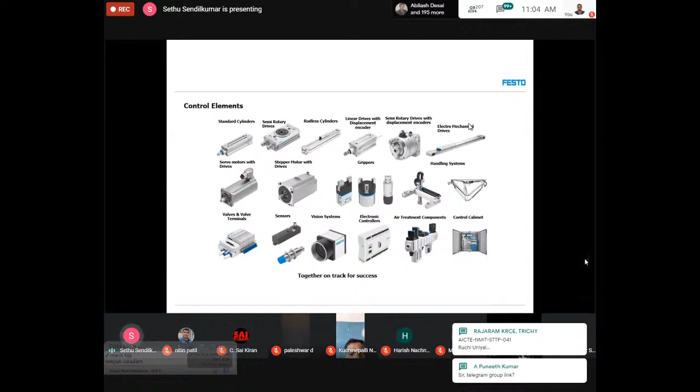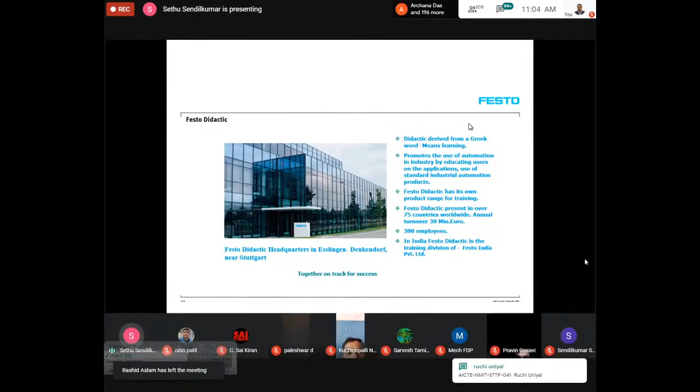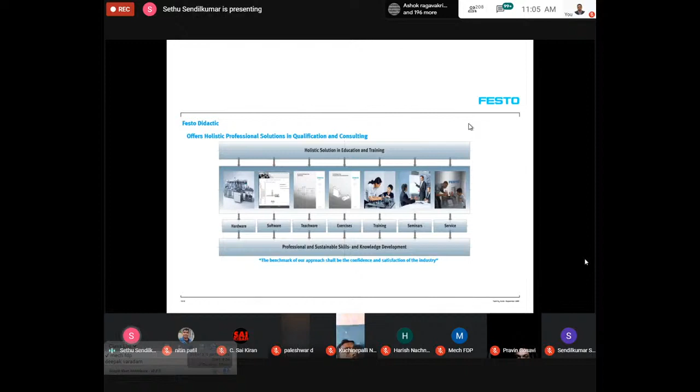Festo Didactic offers a holistic solution in the form of hardware, software, teachware, exercises which are in the workbooks, and training and seminars, along with other related services for spreading the knowledge in the institutes as well as in the industry.

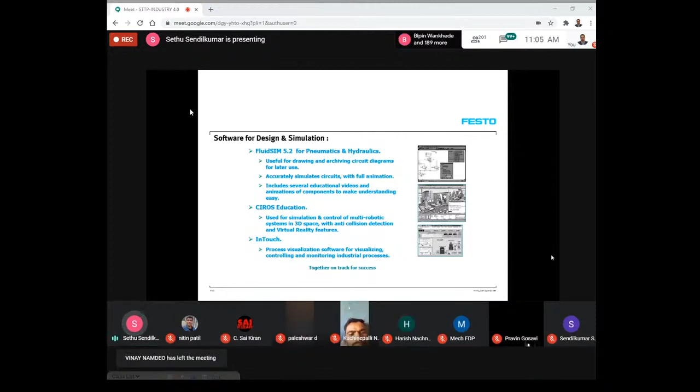There are a lot of softwares offered from Festo because we believe in a holistic solution. FluidSim is one of the softwares very popular in the institutes. We also have the CIROS Education, which we will be using in the second half and also tomorrow. This is a mechatronics software which is actually used to simulate whatever mechatronics applications are involved. We also have many other softwares like InTouch and other things like that.

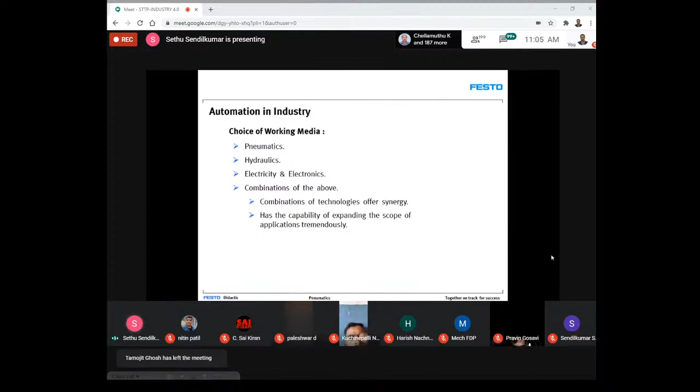We will now get into the introduction to automation. Automation in the industry can be performed in many ways. One such way is pneumatics, hydraulics, and electrics and electronics. So the choice of...

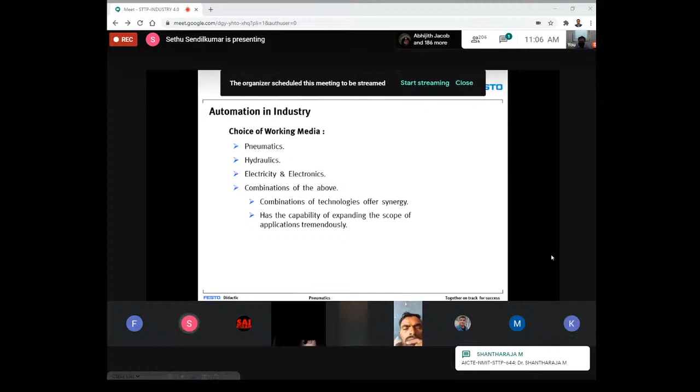...application has an inclination towards pneumatics, the reason being which we will see a little later. There is automation happening with other energy types also, like hydraulics and electrics, but pneumatics is predominantly being used, or it is synonymous with automation. That is what we are going to look at in the coming sessions.

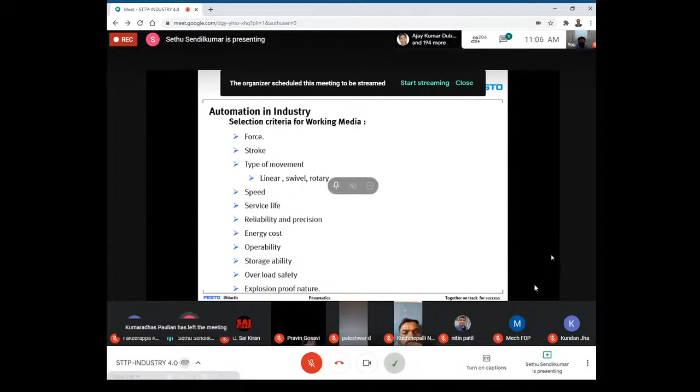If you look at the reasons for selecting this working media, especially pneumatics, force and the stroke length are the primary considerations. The reason being, force and the distance through which this force is applied is what is work. So naturally we are trying to use this energy in order to work. When employing this energy for doing work, we need to see whether it is adequate in terms of the force exerted as well as the distance reached through applying this force.

We might have different sorts of motion. Maybe we might have linear motion, we may have a swivel motion, or maybe a rotary motion. So we need to look at whether this sort of energy can offer this particular thing.

In the selection process, there are other secondary considerations also which we have to give consideration to, because if we overlook these, that might result in the failure of the application on the shop floor. One such thing is speed, which is an important consideration we need to look at when making the selection.

We make a big investment in the selection of this energy type, so we need to also look at the service life which can be offered by this energy or the components involved. Reliability is another important factor, because if we have a reliable selection of components, then we have trouble-free performance.

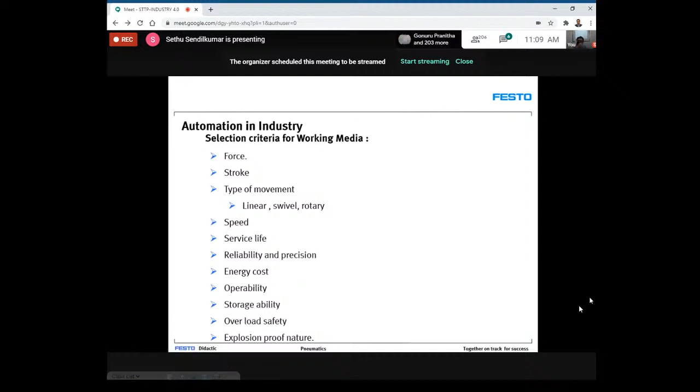If we look at the purpose of pneumatics and how this name was coined: pneumatics in Greek, or pneuma in Greek, means breath or wind. That is how the name pneumatics had been coined. It deals with the properties, motion and behavior of air. It is basically the use of this energy to transmit and also control energy through the use of pressurized gas. That is what pneumatics means.

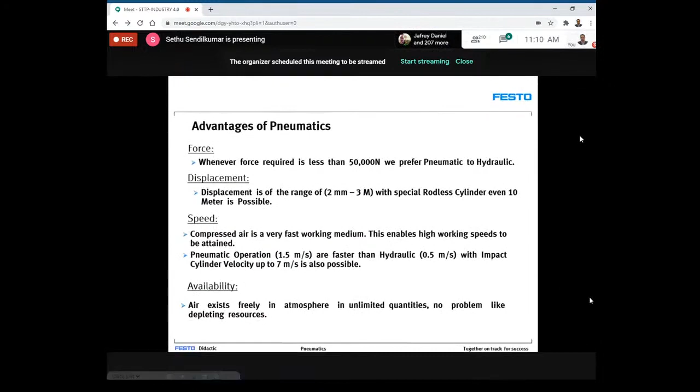So we were looking at the considerations when we wanted to choose the energy. We are always particular about what force is being exerted with the help of the pneumatic application. You need to limit it to 50,000 newtons. It's not that pneumatics cannot generate more than 50,000 newtons. The force is a function of pressure times area, and once you start increasing the area, you can derive any big force you want. But the reason for limiting it to 50,000 newtons is because it is an indirect form of energy. This energy is not God-given, it is produced. We use electricity, make mechanical movements, compress the air, and get this energy which we use in the cylinders.

So when we are doing this, we have to be very judicious, because air costs very much — every additional bar of air increases the cost exponentially. If you increase pressure to very high pressures, more than 6 or 8 bar, it is also not very suitable. At the same time, if we are doing 100, 200 cycles a minute, and the cylinder is reciprocating up and down that many times, you can imagine how much air is used in each stroke, which might result in spending air in a huge amount — not very economical, because we are using pneumatics in automation.

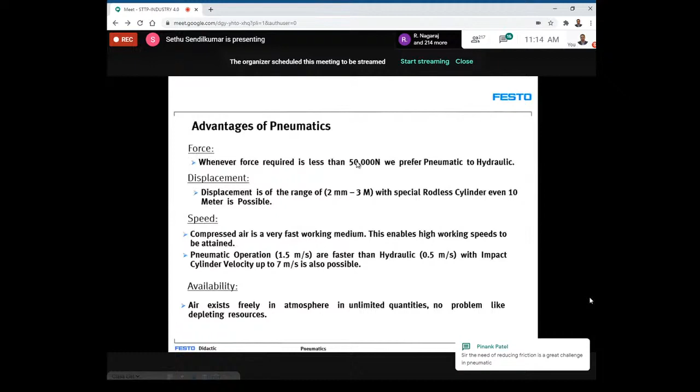Then, of course, it can be transported over a very large distance. Even 1,000 meters is possible without any significant loss in pressure. That is why we choose pneumatics as an energy type.

And of course, the performance from pneumatic systems is very uniform, in the sense that they are not affected by temperatures and pressures. That means you can work even up to 200 degrees centigrade and 30 bar pressure without significant change in the performance of the actuators.

Of course, cleanliness is one big important reason used in many industries like textiles, printing, pharmaceuticals, and all these places, because leaking pipes don't contaminate. They may leak, but they will not result in any contamination because the medium used is air. So we can use them to whatever extent, even with those leaks. That means it is very clean.

Explosion proof is the other reason. We are using only 5 to 6 bar of pressure in our application, while the components are rated for about 8 to 10 bar. So naturally, they cannot create any explosion because they are sturdy enough. The metallic body of the valves and cylinders doesn't explode at that pressure. So the advantage of using pneumatics is that it doesn't require any additional firefighting equipment with this arrangement.

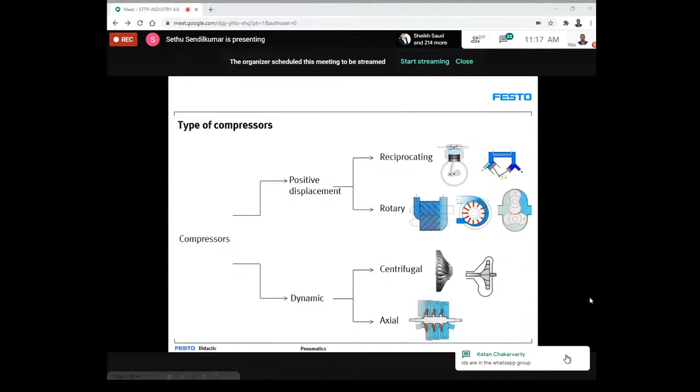So basically, if you look at the reciprocating and rotary compressors, they employ the principle of containing and pressurizing the air. The reciprocating compressor can produce anywhere between 0 to 15 bar, and you have something around 20,000 meter cube of air per hour that can be generated.

So any pressure is possible with the help of these reciprocating compressors, which actually produce compressed air at a very high pressure. Then there are also rotary compressors, which can be screw type, vane type, or lobe type. So they are also suited for pneumatic applications.

The screw type of compressors find wide applications inside the industry. Up to 25 bar pressure is possible, and about 60,000 meter cube per hour is possible with these sort of compressors. So very often we find the rotary, screw type of compressors being used.

Of course, the vane type of compressors are suited, but they don't produce very high pressure ranges. Maximum 7 bar is what is possible, and the flow rate is also not as high as the screw type of compressors. The lobe compressors fall under the rotary compressor category, but again, not very high pressures.

Similarly, the dynamic compressor.

Screen is not visible. No, I am in the presenting mode only. Sir, it's visible. Okay, now? Sir, screen is visible. Please let me know, because the screen is not visible now also, sir. Screen is visible now, sir. Please let me know in case it's not. I see one of the other laptops is not visible with the screen. So how many of you are facing this problem? Is it a big number, or just one or two?

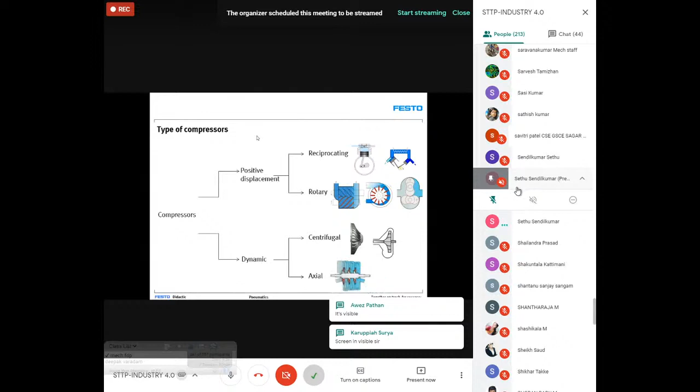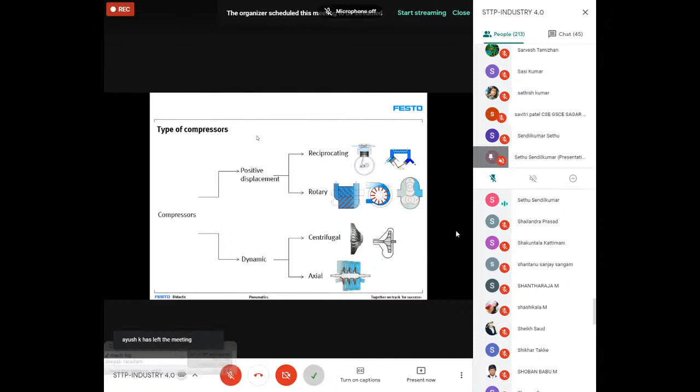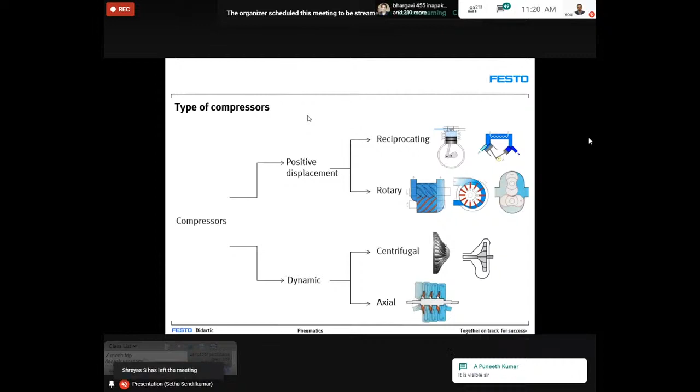Okay. So in the dynamic compressors, you have the centrifugal and the axial compressors. So basically, these compressors use the mass acceleration principle. Of course, very high velocity of air is being driven through these turbine wheels, by which you get a small pressure, about 4 bar, but a huge flow volume, about 5 lakh meter cube per hour, is possible. So you have a very high flow rate possible with this sort of compressors, but not a very high pressure, hence they are not used in a big way in pneumatic applications as such.

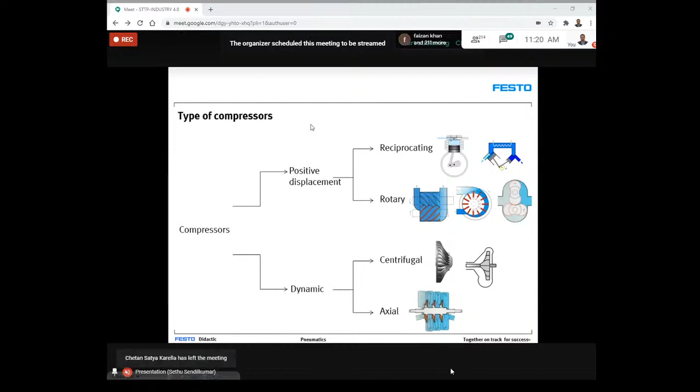Once we have produced this compressed air, the advantage with pneumatics is that you can store it. So basically, you can store this compressed air in reservoirs, which you can design according to your requirement, so that even 8 hours of production time can be supplied with this pneumatic air. Once you store it, you have the advantage of cooling the air so that you can remove some moisture present in the compressed air. Then you can distribute it to your different locations where the service units are, which further take care of treating this air.

So basically, the air distribution in your arrangement involves primary treatment and secondary treatment. The primary treatment is cooling and drying, which can be done with air-cooled or water-cooled arrangements, and then drying with the appropriate methods, which we will see a little later. Other than that, we also have the storage, that is the reservoir, which can cool the compressed air, and finally it can be given out into your network.

Usually the networks are spread across in a ring, so you can tap those requirements from the top at an angle so that water cannot climb into your application. Similarly, there is a gradient, say 1 to 2 degrees, so that the water can be collected at the end of the arrangement. That prevents moisture getting into your application.

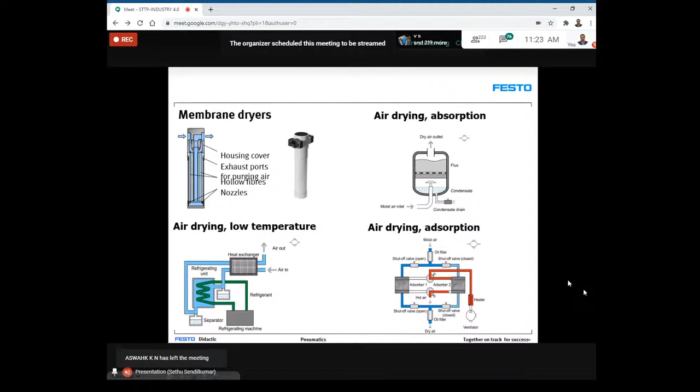In the refrigeration drying, the air is passed through a heat exchanger, where heat is exchanged between the incoming air and the outgoing air. Then it is passed through a chiller zone, where it is chilled further and condensation happens, and finally you have dry air which can be used in your application.

Of course, after having dried this air, you can straight away use it in your application, but generally we use a secondary treatment in every application. That's where you find the filter, regulator, and lubricator in every application. The filter is nothing but an arrangement where air is made to pass from one end to the other. In doing so, it passes through a swirl plate.

So once it is passing through the swirl plate, the air gets an angular twist, by which huge particles like moisture and dust get centrifuged, and the air hits across the baffle plate and is driven into the filter cartridge, which is usually a 40 micron filter. So the air from outside passes into the inside, gets filtered, and results in the outlet. That is how the filter works.

Of course you can go for ultrafiltration to whatever extent, but you need to look at how much pressure drop is going to happen. Excessive pressure drop actually costs you money, because you spent electricity to produce it, and then you are blocking it with the filter, resulting in more pressure drop, which is not an economical option. So wherever necessary, you can go for ultrafiltration.

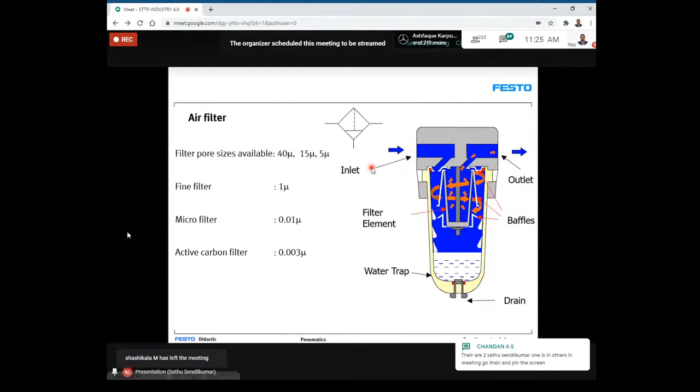Then you have the pressure regulator, which is used because the air is pumped from the source at a high pressure, somewhere around 1 or 2 bars higher than what is required at your application. So these pressures have to be adjusted to your requirement, for which we use the regulator. The regulator is an arrangement which reduces the pressure; it doesn't increase it. As you tighten the knob, it acts on the diaphragm. The diaphragm in turn lifts the plunger, and the air starts to flow between the inlet and the outlet.

Now, the inlet and the outlet are felt by the diaphragm at any given time. These pressures are going to vary according to the situation, maybe a dynamic situation where on the outlet there might be a block and the pressure is going to increase, or it might happen at the inlet also. That is felt by the diaphragm, and the diaphragm is either pushing out or drooping down. When it comes down, the spring on the inlet of this pressure regulator narrows the passage and starts to give little air.

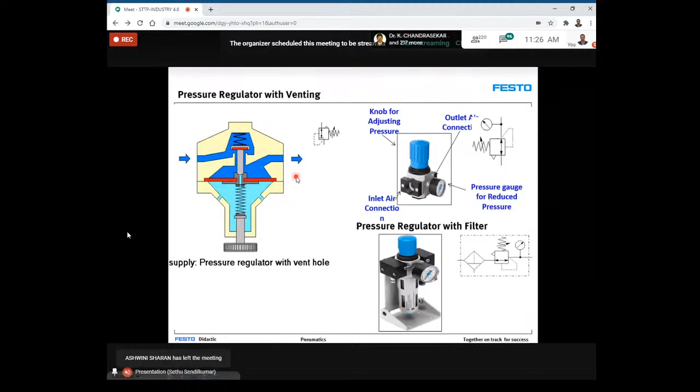Or when the pressure is falling at both sides, the plunger is going to be lifted because we have set a preset pressure here. The plunger lifts up and creates more passage for the air to move out. That way you have the diaphragm fluttering in and out, by which a constant secondary pressure is maintained by this arrangement. Thereby we get a very uniform supply of pressurized air into the arrangement.

Of course, there are lubricators, but generally in training situations we don't use a lubricator because it's not frequently used in our application. The reason being, lubrication is already provided by the manufacturer in the components. They are only required if there is a necessity, like if you are operating at a very high frequency, or the diameter of the cylinder is very large so the surface area is more, or the cylinder is getting heated up in specific applications. In those situations, or where there is a lot of wear and the cylinders need frequent replacement, we can think of using a lubricator. But in training situations, they are usually not used.

If you look at the control, pneumatic controls have 5 distinctive groups of elements according to their functional responsibility inside the circuit. Certain groups of elements only supply air; we call that the energy supply unit. It can be a filter, regulator, or lubricator in the application. Other groups of elements are only responsible for initiating a signal inside the circuit; we call them signal input elements. Then we also have signal processing. Many times we need to process the signal according to the logic expected in the process, so we also have processing elements.

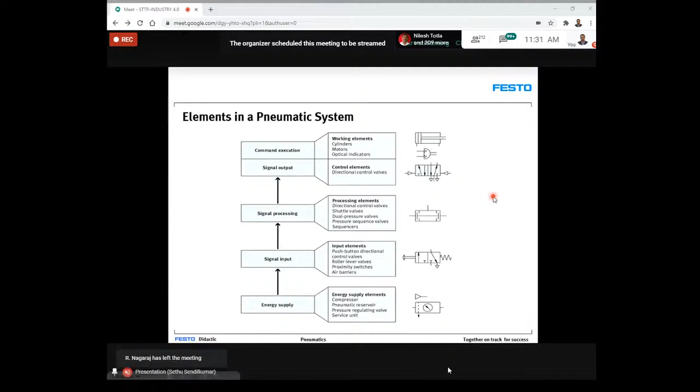So if you look at the energy element or the working element, which is nothing but the cylinder, the cylinders come under two categories. One is the linear actuator and the other one is the rotary actuator. If you look at the linear actuator, they can be either single acting or double acting, from any manufacturer for that matter.

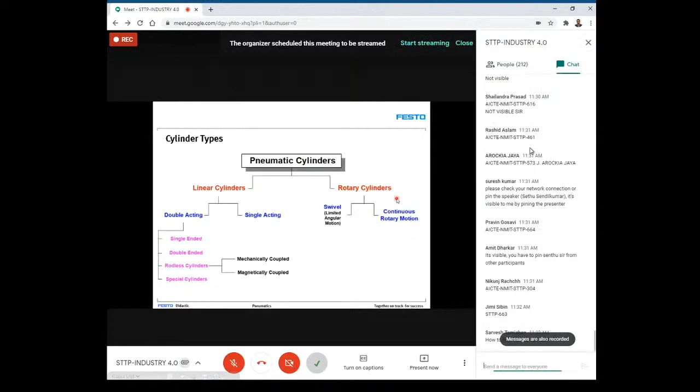In the case of a double acting cylinder, you have many designs possible depending on what you require. Basically a double acting cylinder has a single ended type. You have rods coming out on both sides, which are known as the double ended type. Then we also have rodless cylinders so that we can get huge stroke lengths, mechanically as well as magnetically coupled rodless cylinders. And of course, there are plenty of special cylinders to suit every application.

Similarly, we have rotary actuators, both limited angle of rotation and continuous rotation. But continuous rotation doesn't find much application in pneumatics, the reason being that you can use an electric motor to create those rotary motions instead of deriving pressure energy and finally reaching rotary motion. So that is where you don't find rotary actuators much in pneumatic control engineering. But we cannot say that it's totally unavailable.

We find these rotary motors in certain applications because pneumatics has the advantage of overload safety. An electric motor can rotate only 1450 RPM, but a pneumatic motor can reach more than 1 lakh or 2 lakh RPM. So certain manufacturers devise pneumatic motors for specific applications, like a dentist drill or a portable grinder, where you want to reap the benefit of high revolutions as well as overload safety.

So that is where generally it is not finding application in pneumatics, but specific products incorporate pneumatic motor in their application. But limited angle of rotation is possible, both 0 to 90 degrees, 0 to 180 degrees, 0 to 270 degrees, something around this range can be possible because we are looking at controlled motions as such.

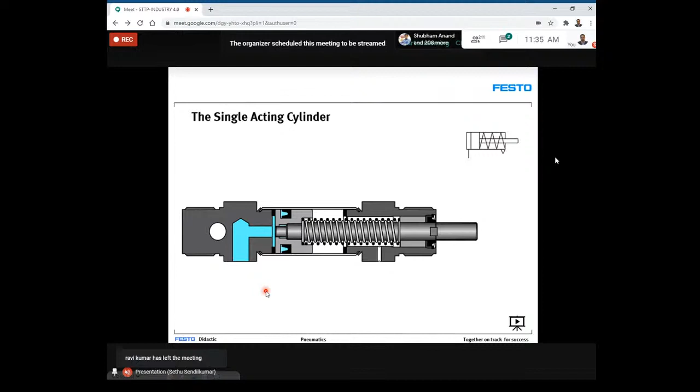The forward force is not the same as the return force. The return force is slightly lower as such. So you have to look at what is the force that is being delivered in case the same load is acting on both the sides as such. Because you have an annular area on this rod side, we call this as the rod side, and this we call it as the piston side.

The piston side has got the full surface area against which the compressed air is acting, resulting in a force that is different from what is happening here. Because on the other side, the rod side, this much of the rod area is not available for the compressed air to exert force. So that is why you have a lesser force on the other direction as such.

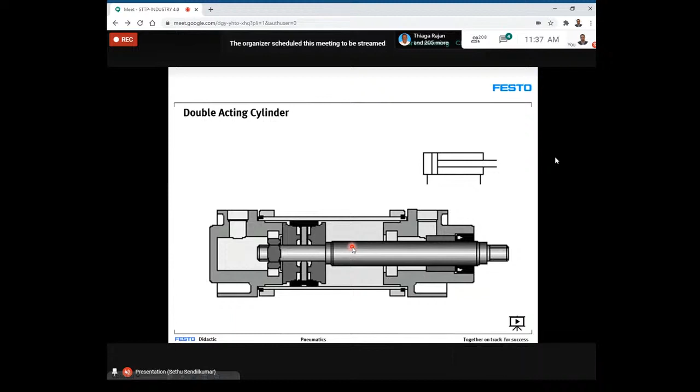Of course, you can get in any diameter from 6 mm to 320 diameter cylinders as such, and stroke length somewhere in the range of about 2 to 3 meters as such. So you can start with even 1.5 mm stroke cylinders also that are available, but as a special cylinder. Of course, in the normal range, it is available from 6 diameter to 320 diameter. Of course, as I told you, the forces are not the same in both the directions.

But the reason for having, other than the uniform force, is you could have a through hole in this arrangement by which you can supply air and create vacuum. So you could handle jobs which was not earlier possible. So that means you could use it for handling.

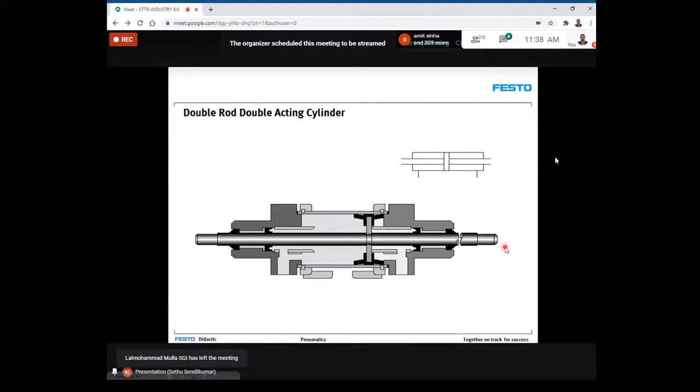And also you can use it for pick and place arrangements, or maybe for filling arrangements, where you can pass some shampoo or hair oil or whatever through this rod and make your automation such that they can insert those things into the cans or whatever arrangement is present here. So you can use it for pick and place as well as for filling applications, and that is where these sorts of cylinders are considered in applications.

The other cylinder is the rodless cylinder. We are always limited by the stroke length because you have the axial force and also the radial force acting, which makes the cylinder bend or buckle when it is farther away from the bearing area. So in order to prevent this, we need a cylinder which doesn't have a rod, and that is where the rodless cylinder comes into the picture.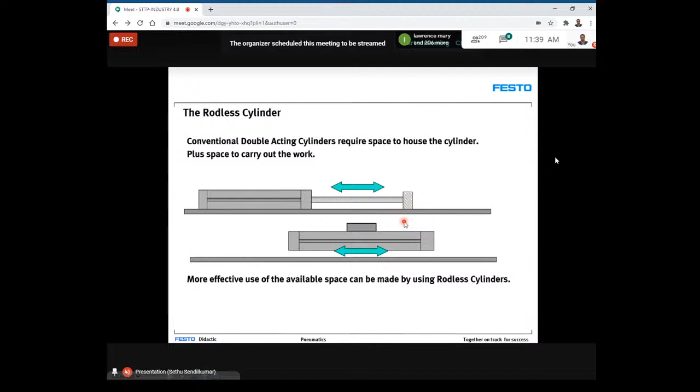Of course, there is the mechanically coupled rodless cylinder, where the yoke is connected to the piston and it moves from this end to that end as you pass air into one of the sides. When it moves, a patented sealing band seals the dovetail shape underneath. You have the air inside this cavity, so when it moves further from the initial home position, the sealing element seals it and makes the compressed air act only on the piston, and it moves further.

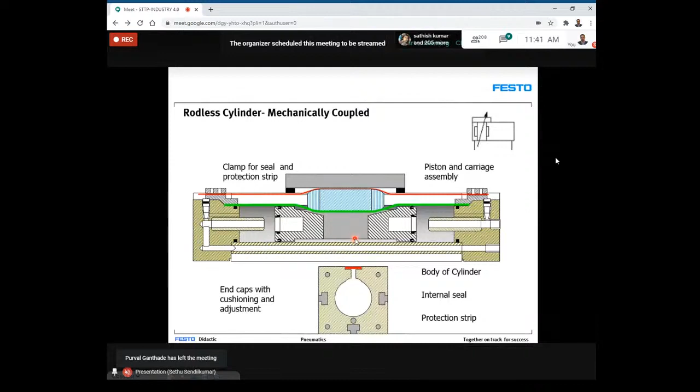On the other side, the sealing band is being peeled, and it is moving towards the other side. Here you don't have air. All the air in front of the piston is driven out through the port here, and simultaneously it is being released. So you have a zip-like action happening inside, and you can achieve any big stroke length. This is how it looks in the case of a rodless cylinder.

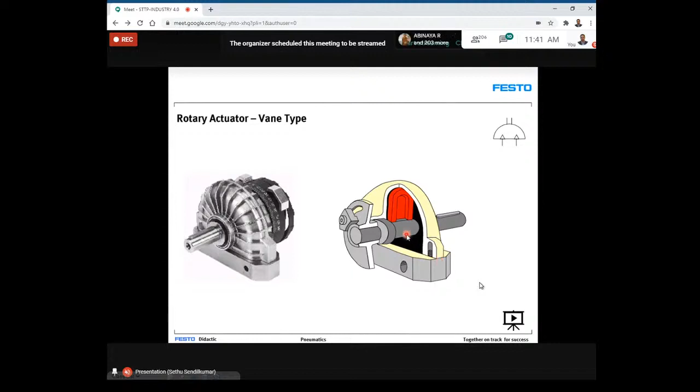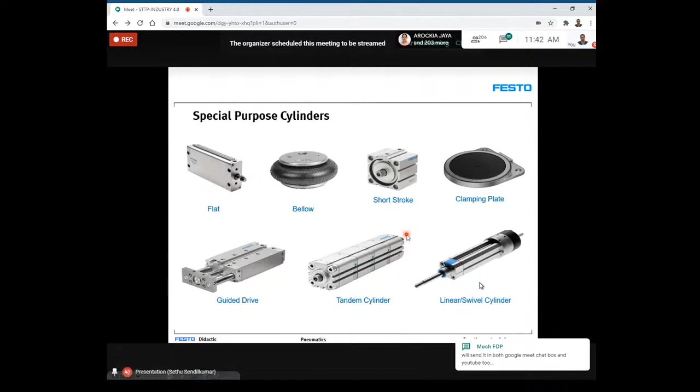You also have the vane type of rotary actuator, where a vane blade connected to the shaft moves inside the cavity. When you pass air this way, it rotates one way; when you pass air on the other side, it rotates in the clockwise or anti-clockwise direction. But you cannot generate a very high torque in this situation; the maximum is about 20 Newton meters. These are some of the actuators we just looked at, and they are used in pneumatic applications in varied situations.

Now the other important thing is the valve, which is used in pneumatic control. Everything is a valve because we are using a medium that is air. They have to be either blocked, opened on one side, or closed on the other side. Valves are used for starting the flow, stopping the flow, or reversing the flow. As per ISO standard 1219, at least 4 pieces of information are necessary so that the valve is uniformly understood by all users.

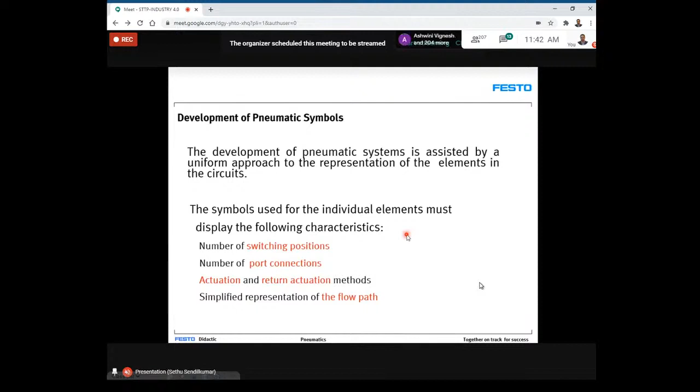One is the switching position, the other is the port that has to be mentioned in the diagram and its display, as well as how it is being actuated and how it is being returned, and also what is the flow path inside there. So all this information you might see in any valve's representation, so that you can have a uniform understanding.

A position is represented by drawing a square like this. If there is one square, it is one position. If there are 2 squares, it is 2 positions. The flow is represented by a straight line or a slant line, and a blocked port is shown with a T mark.

Then we also have to show the ports. The ports are usually shown on the right hand side. That is the normal position, whereas this is the actuated position. So in the normal position, if there are 4 lines drawn, it means 4 ports. If there are 5 lines drawn, it is 5 ports.

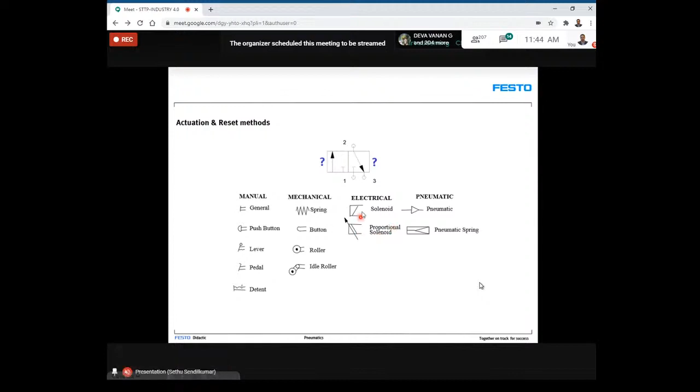You also need to show how it is being actuated and how it is reset. There are different means to actuate and reset: manual, mechanical, electrical, and pneumatic means, and each one has got a specific symbol to mention them. So you could use any of these to show it on this side, telling you it is actuated manually, mechanically, with electric arrangements, or with pneumatic arrangements.

The valves are designated by indicating the number of ports, which is the first number, and the number of switching positions. So a valve represented as 2 by 2 means it has got 2 ports, meaning you make 2 possible connections, and it also has 2 switching positions. So the valve has got dual possibilities to function - it can function like this, as well as like this.

Similarly, a 3 by 2 valve has 3 ports for making connections - one is a supply port, one is the outlet port, and the other is the exhaust port. It also has 2 positions, so you can make it function this way or that way. It can be either a closed arrangement - when the inlet is closed, you call it normally closed. When the inlet is initially open in the default situation, we call it normally open.

A 5 by 2 valve has 5 ports, 5 connections to make, and there are 2 possible positions to shift between. You could also use a 5 by 3 valve, which has 3 possible ways to function, and 5 ports through which you can make connections.

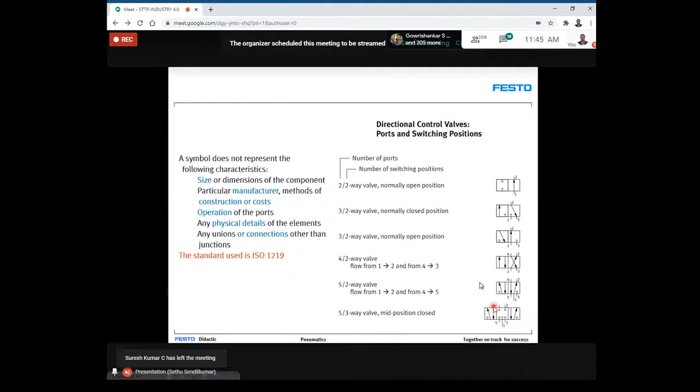The ports are numbered as per letter as well as number marking. The number marking, usually 1 or P, represents the inlet port; 2 or 4 represents the outlet ports, meaning these ports are connected to the cylinders. 3 and 5 are the exhaust ports to which you connect the silencers, or they can be lettered S or R, whereas the outlet ports can be either 2 or 4, or A or B.

Similarly, you have pilot ports for switching the valve in case of a pneumatic arrangement. Like 10 is going to result in a supply between 1 and nowhere - that is, 0 means it's not going to connect anywhere. Similarly, 12 means 1 and 2 is getting connected. So 14 means 1 will connect to 4 if you have a signal here; 1 will connect with 2, which is why it is known as 12. So 12 and 14, or 10 and 12, are the different possibilities you can have in terms of valve port markings.

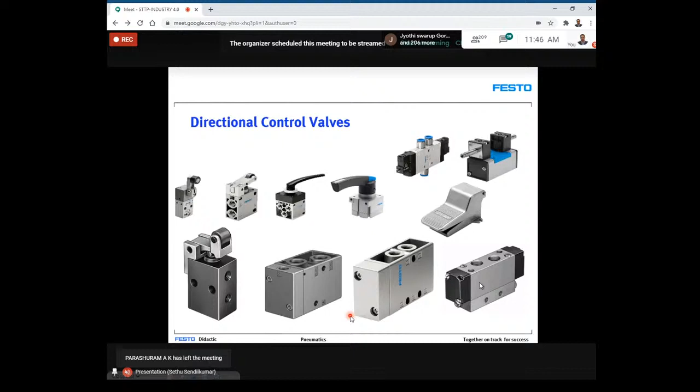So these are some of the valves which you can see, just to give you an understanding of how it really looks in the physical form.

Now we have covered the cylinders and the actuators. Now we look at the electro-pneumatic part, because our actuators are going to be electrical as well. Electro-pneumatic is nothing but an arrangement where you give electrical signals instead of the pneumatic signal. So you need 2 parts inside your whole system - one is the pneumatic part and the electrical part. The advantage of using electro-pneumatic is higher reliability.

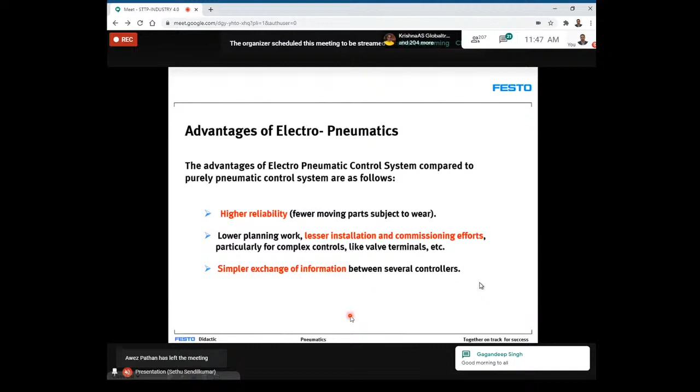You can easily adapt this to other devices like the sensors that are being used. And of course, you can very easily connect those circuits with the help of electro-pneumatics as such. So as I told you, there are 2 parts: the pneumatic part and the electrical part.

Our objective is to provide electric current to this solenoid, by which the valve can switch and extend the cylinder. In order to get a signal at this place, you need a control circuit which is electrical as such. So like in our pneumatics, you also have input devices, processing devices, and output devices.

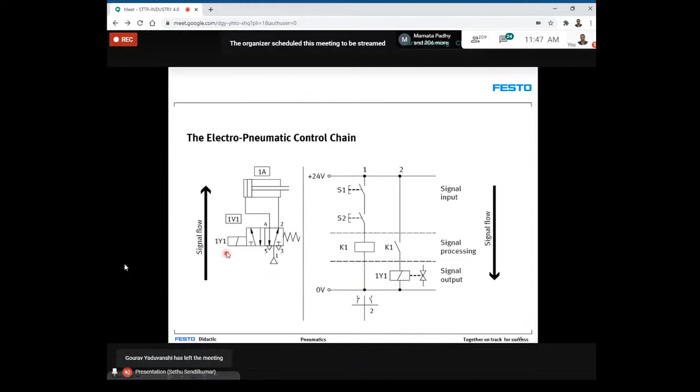So the signal flow is from top to bottom. That means the signal, 24 volts, starts to flow from here. As the switches are closed, it acts on the relay. Once the relay is energized, its contact closes on whichever solenoid it is connected to, and that gives you the output to the solenoid, which you can realize here, making the cylinder move forward.

Of course, there are different elements used as input and processing. You have contacts which are normally open contacts, normally closed contacts, or changeover contacts. These contacts are used to process the signals. Similarly, contacts with the actuation means also help provide the signal into the circuit, so this is the other possibility here.

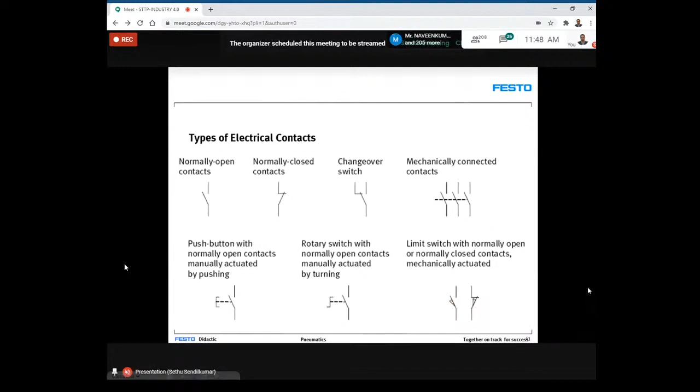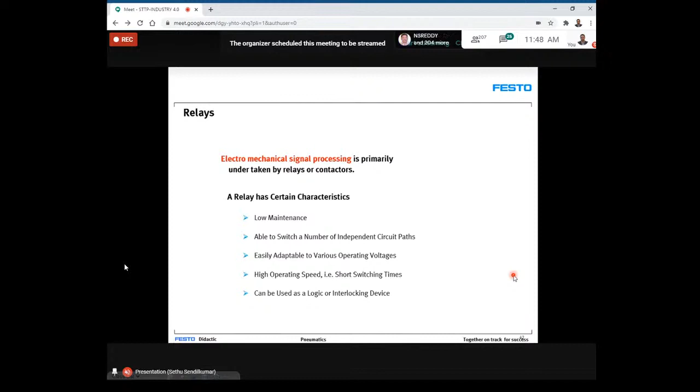So what is a relay? A relay is actually an electromagnetic switching device. It consumes very low energy, only a small voltage, and switches the valve. It has very low maintenance, very fast switching, about 2 milliseconds to switch. You can adapt to many parallel paths to switch many devices according to the number of contacts, and they can also be used for producing logic.

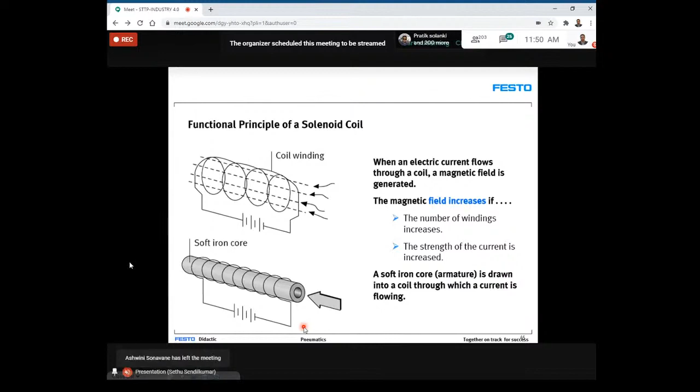Similarly, the solenoid works on the same principle. A winding is on top of the soft iron core, and this core gets an electromagnetic force. Once you energize it, it starts to move in one direction, restricted by a spring, and it overcomes the spring force, lifting up to create a passage for compressed air to flow into it. So you have the solenoid coil.

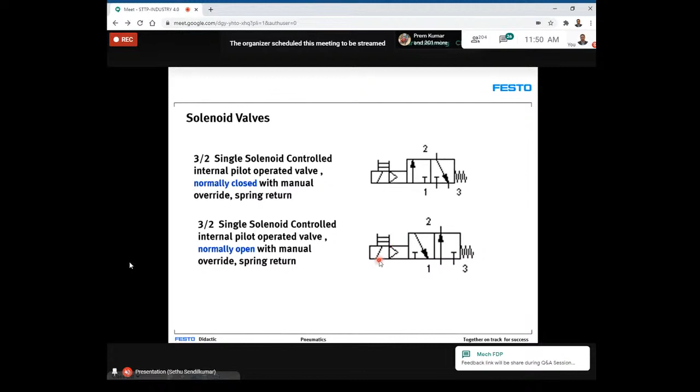Once you energize this, the solenoid allows air into the arrangement so it can be switched, and you can realize this position. Similarly, when you energize this, the open valve will now start to close. The solenoids can be on one side or two sides — if it's on two sides, we call it a memory valve. In either case, whether pneumatically or electrically actuated, a double solenoid or double piloted valve is known as a memory valve because it retains the position of the last signal applied until it encounters a counter force in the other direction.

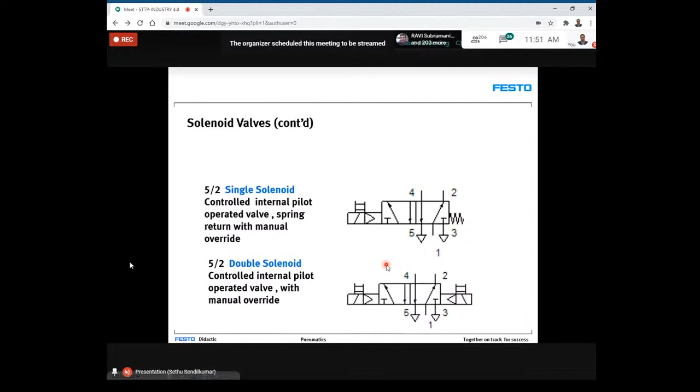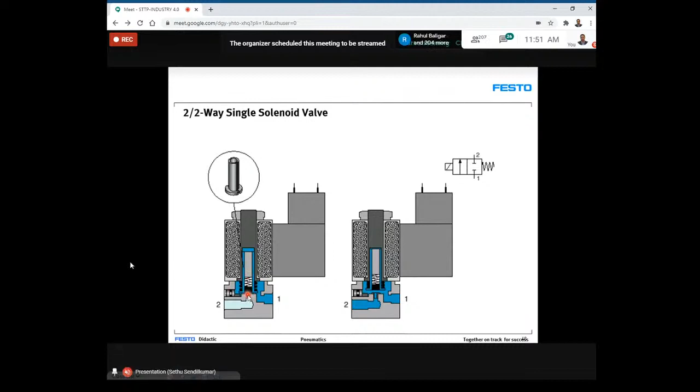So here is the arrangement to look at. One is getting blocked because the plunger, due to the spring, is closing the port here. Once you energize this, the plunger lifts up and air starts to flow into the outlet. Similarly, in the case of a solenoid valve, a 5/2 valve, the port is closed on 4, so no air can reach into this — only 1 and 2 are getting supplied.

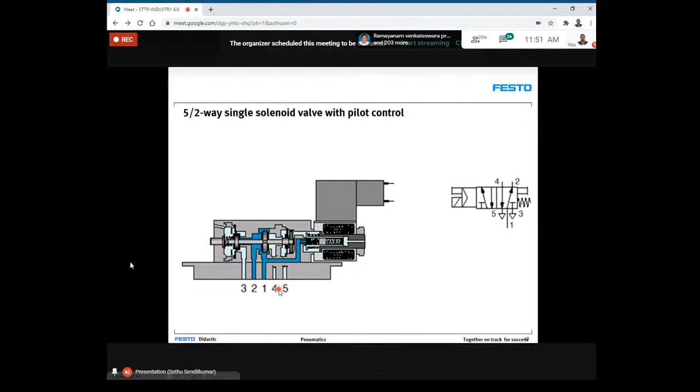So when you give compressed air on this, or when you energize this coil, the plunger lifts up and the air which was waiting at this place now acts on this piston here and moves it towards this side, blocking port 2 and making the passage for 1 to flow into 4. That is how a solenoid works. So this is how it looks, the single solenoid and the double solenoids inside your arrangement.

Of course, we are going to create many logics that are possible here, which are part of Industry 3.0, because we are going to control the cylinders and valves with the help of an electrical signal, either with the help of a relay or with the help of a PLC.

So here we have the switch closed. When you close the switch, there are two switches, one is the start switch and the other is the stop switch. When you close the start switch, relay K1 gets a supply. The instant it gets the supply, the contact closes, since it takes only 2 milliseconds to switch. It closes on both these places. K1 closes on this path, K1 also closes here. So now you have two parallel paths supplying to this device, which means you have the possibility to release one of them and retain this supply.

So once you press and release button S1, K1 gets the supply and lamp H1 starts to glow forever, despite releasing S1. In order to break the circuit, you have this closed contact of S2, which when you press it for a moment, disrupts the supply on K1, resulting in the contact losing connection. It opens up instantaneously and the lamp switches off. So again, you have to initiate with S1 to repeat this.

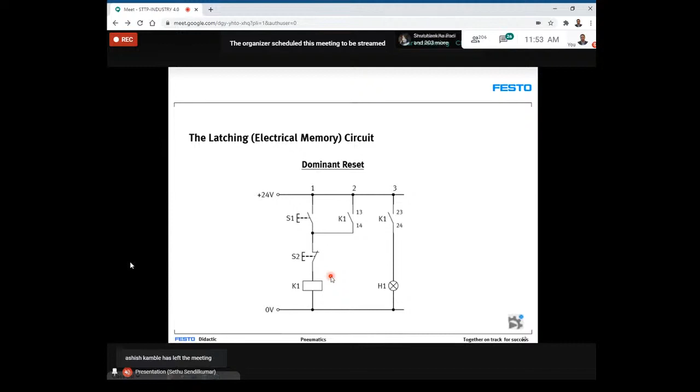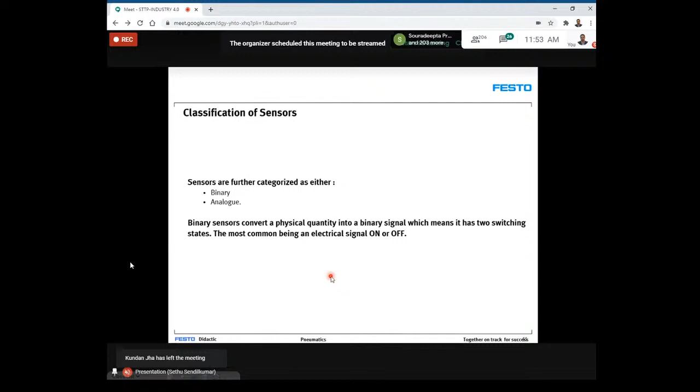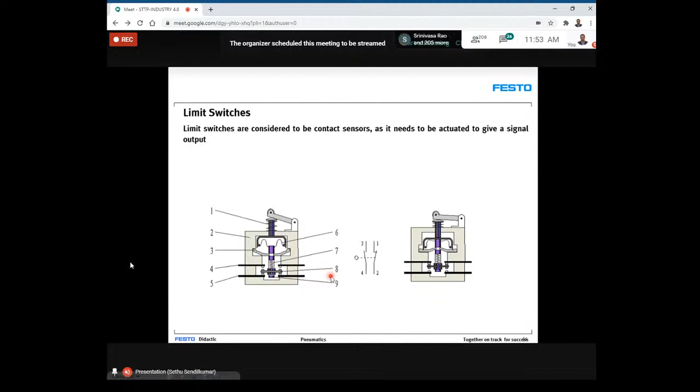Now we will look at the sensors. There are different sensors available, basically contact type and non-contact type of sensors. Again, these sensors fall under two categories: either a binary signal or an analog signal can be produced from these sensors. In the contact type of sensor, we have a limit switch, which is used in applications here. A limit switch expects a physical contact for the sensor to give a signal.

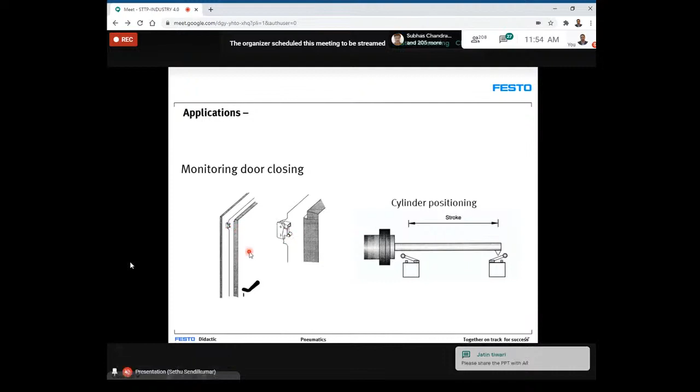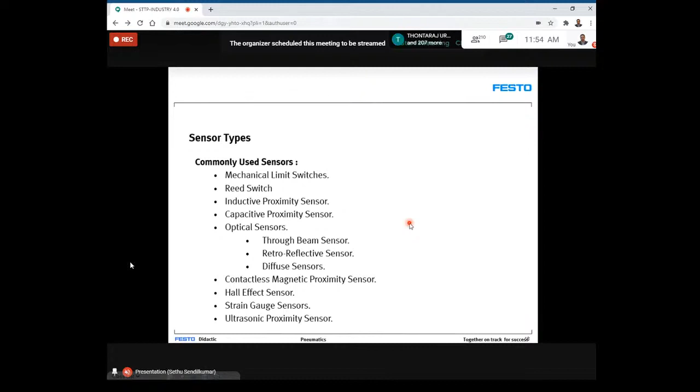Like in this door, where you have the contact type of sensor. Once it closes, it comes and hits against some fixed element, by which you can trigger a signal output. Sensors come in different sizes and types: magnetic reed switches, inductive sensors, capacitive sensors, optical sensors falling under through beam, retroreflective and diffuse types. Then there are contactless magnetic sensors, Hall sensors, and many other types of sensors.

An optical sensor has at least 3 different varieties. The through beam, where collector and emitter are apart — when an object comes inside, it is not falling onto the collector, so it gets a detection signal. In the case of a retroreflective sensor, the light is passed, falls on the reflector, a mirror-like object, and falls back onto the collector. If anything disrupts this, then you have a signal.

There is also the diffuse type of sensor, where the light is emitted — if an object comes here, each body has some amount of reflectivity, and based on whatever is reflected back, it can fall on the collector and give you a signal. Similarly, an inductive sensor: if an object comes into the electromagnetic field, it gets excited, and based on the excitation, it triggers a voltage, which is amplified to give an output. Similarly, a capacitive sensor: when you bring an object between its electrostatic field, the field gets excited, and based on the threshold, it gives an output.

Similarly, a reed switch, which is nothing but two metal contacts kept apart inside a glass tube. When an object, usually a magnet, comes near it, the contacts get held together and you get the output from this sensor.

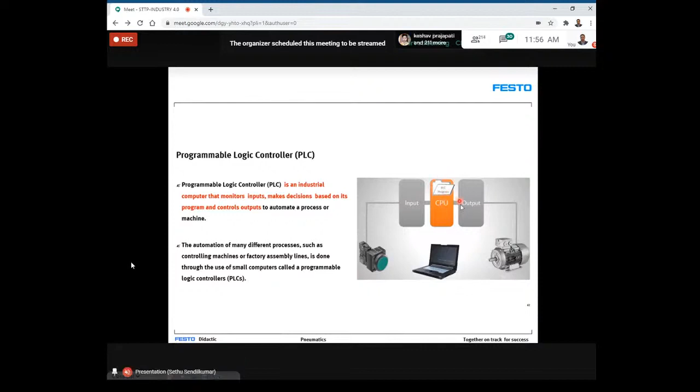Now we will look at the other important thing in today's industrial automation, since the 3.0 revolution has come into the picture. That is, instead of using the relay, we use PLCs. A programmable logic controller is an industrial controller which monitors the input, executes the program and gives you the output, as seen in this figure. So the input signal is given into the CPU, and based on the program we have dumped into it, it evaluates and gives an output, which can be connected to any device here.

So you can increase productivity, enhance quality, use less energy with the PLC, and improved safety features are possible. Unlike the relay, which uses more power because they are physical elements, so you induce a lot of coils inside and that carries more current. Naturally that results in a lot of heat and a reduced life cycle. The relay also occupies more space, and they are very complicated because you have to run kilometers of wires to make your automation task possible. Realizing such arrangements takes a long time, so it is time consuming.

With the help of a PLC you can produce logics, create timing functions, make counting possibilities, handle analog signals, have special modules like PID modules, use arithmetic functions, and use communication modules to communicate with other devices. You have HMI interfaces possible. So you have many possibilities with the PLC.

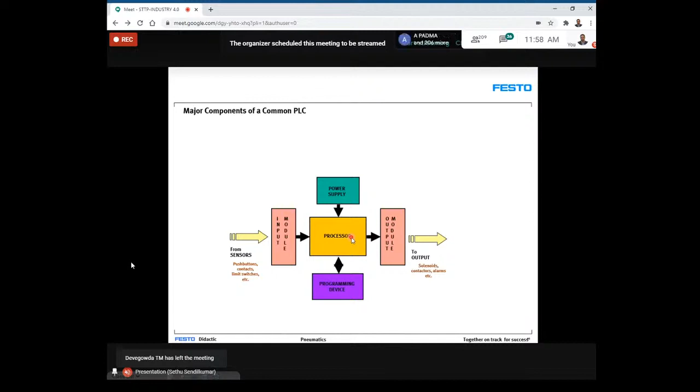So basically the sensors giving the signals are connected to the input module, which converts the signal from whatever physical source into a voltage or current suitable for the CPU to handle. The power supply is external. Once the program is loaded into it, it executes line by line based on the input signals and what we have asked in our program to generate the outputs, which are again reconditioned to suit our application or the rating of the PLC, because all these processes work under 5 volts and have to be converted into a 24 volt output signal or whatever the rating of the PLC is.

So as a physical analogy, you have the push buttons forming the inputs, which are given into the PLC. A program is dumped into it, and based on the evaluation, you have the outputs, which can be reconditioned to suit the requirement in the field.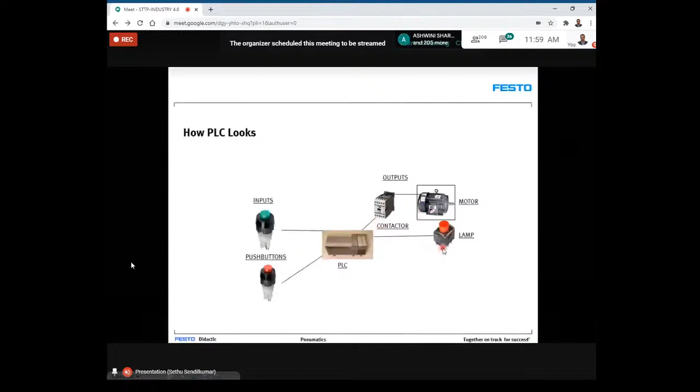So basically, the PLC does a scan. As soon as you power up, it goes through a certain process. It reads the input, executes the program line by line, does diagnostic and other routine functions, and finally writes the outputs at the end of the output scan, which are used for sending the outputs. This happens cyclically, and depending on the power of the PLC it can happen many thousands of times, so that it evaluates in a fast manner.

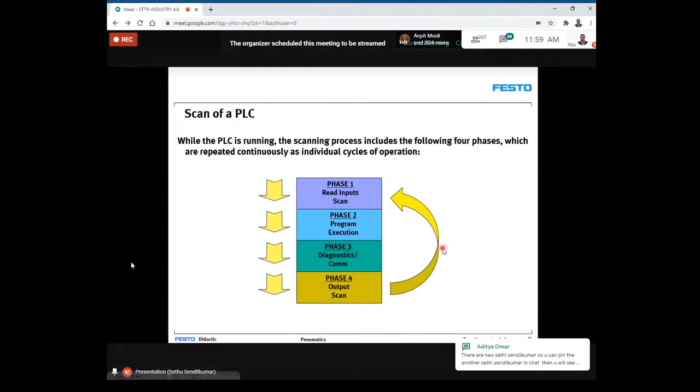There are different languages to program, but the ones we are very familiar with are the ladder diagram, the function block, and the statement list, which are very popular. The ladder is two parallel lines shown in the circuit with a coil as a parenthesis. Whereas the function block uses rectangular or square blocks in which you symbolize what sort of functions you are going to use.

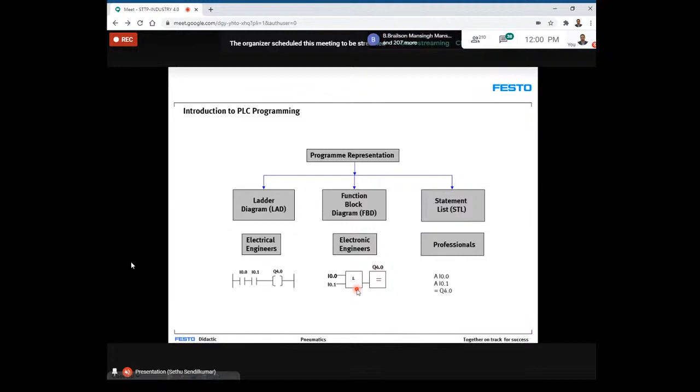So we will look at this: there are these three things that are prominently used. If there are two parallel lines, you are asking to check if the signal is present, check if the signal is high. If you put a line across these parallel lines, you are looking in your program for whether that signal is low. So this is what it means.

These parts we will see in the afternoon, as well as in the coming days. We are going to see the physical programming of the mechatronic systems, where the same set of exercises is used in the afternoon session.

So here is an arrangement where the wiring is something like this. These two contacts are connected through the PLC to the output K1. Now, if you wanted to generate an output where S1 is actuated and S2 should not be actuated, you represent it like this. You want this signal to be high, so check if it is 1. Similarly, you don't want the second button to be pressed, so you are negating it.

For the output to appear here, all the conditions on this side have to be true. This is true if you have pressed it, and this is true if you have not pressed it. So naturally, that will result in an output at 4.0.

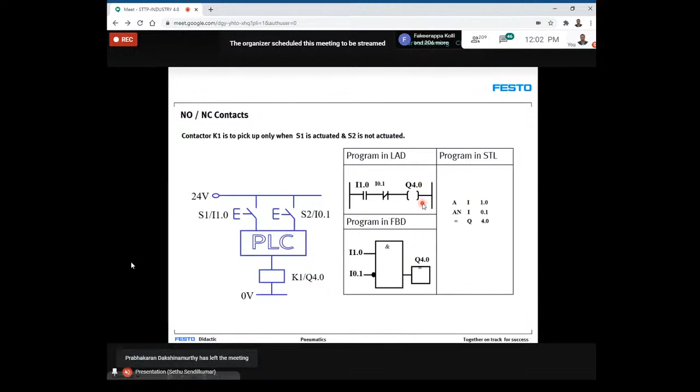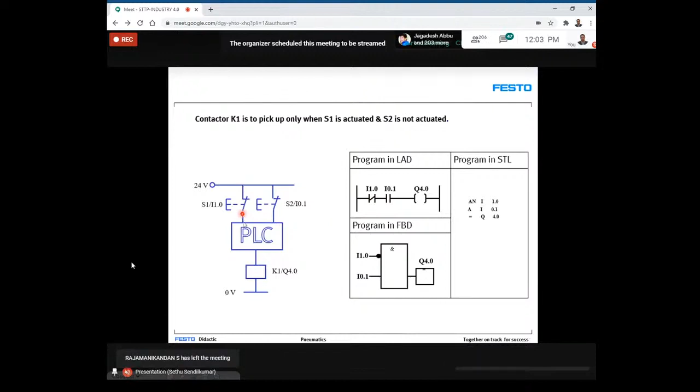Again, S1 is to be activated and S2 not to be activated. This whole thing has to be true for the output to be true. So if S1 is actuated, what will be the situation? The current will not be flowing here, so it is low; it has to be 0 at this place. That is why it is shown with a negation here. And then you have this to be high.

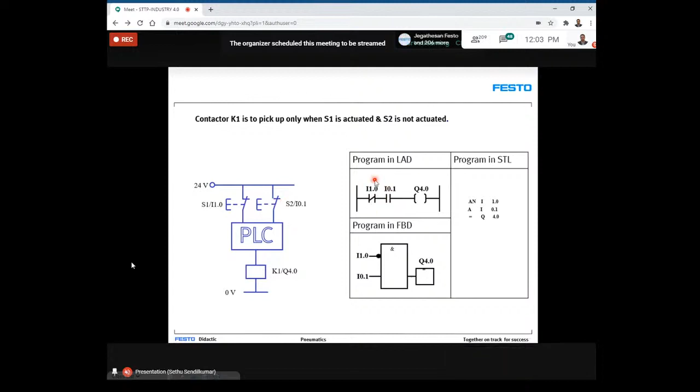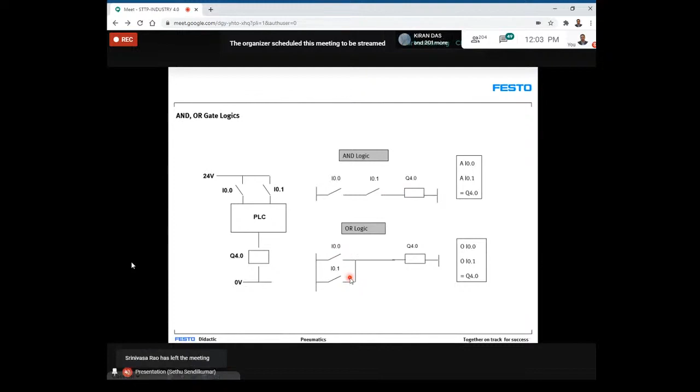Similarly, we can put them in series, where we have realized an AND logic, and in a parallel arrangement, where you can make the OR logic possible. This is what you are going to see in the afternoon, where you will have real systems virtually presented to you in the software, so you can use this software and try to program.

We are going to do it in two parts. To begin with, we will show you how to simulate those things in a single arrangement, using only one actuator so you can make the outputs appear when the conditions are met. But a real-time situation in industry doesn't always have one actuator; there are many combinations of actuators. That is where we bring them in a virtual manner.

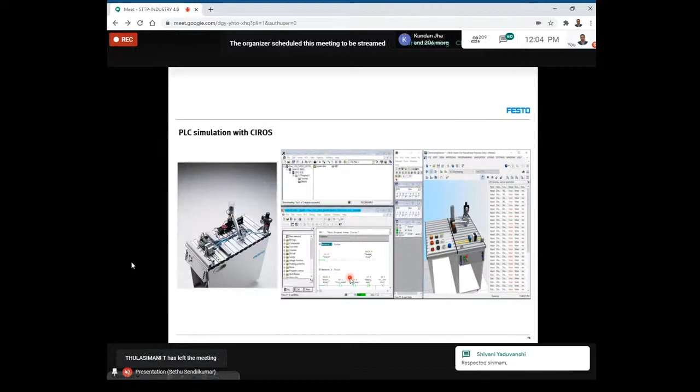We have the MPS stations which are used in WorldSkills. These stations, like real situations in industry, depict arrangements like clamping, ejecting, feeding, braking, distribution, or whatever elemental activities happen inside industrial automation. These elementary functions are put together so you can realize that. Here there are at least 3 actuators, so you need coordinated action in your program to realize those things.

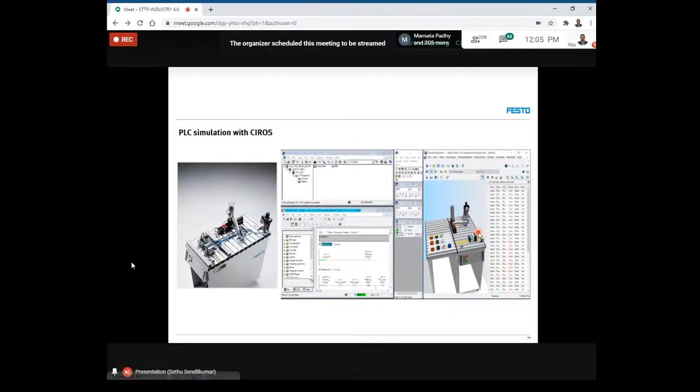So that we will be doing in the afternoon session, where you will first observe this. Whoever is interested to continue, we can also provide you the license by which you can make this thing possible at your end after learning this. So this is all we wanted to present here. We have finished right on time, maybe 5 minutes overshot.

I'm sorry for that. Initially, I still don't have my headphones. It is my onboard computer speaker. My microphone is working, so I am talking on that.

So if you have any clarifications or questions, please let me know. If we can spend a few minutes before you forget about these things, we can address those questions and then carry on with the break and come back in the afternoon session for some practical demos. Any questions, please?

Sir, why don't we replace the single acting cylinder port by Tesla valve geometry? Can you repeat? Why don't we replace single acting cylinder ports by Tesla valve geometry? What is a Tesla valve, sir? A Tesla valve actually increases the flow rate twice or 3 times. Okay. So now, what is your requirement? Whether you want to increase the flow rate. That is what you need to look at.

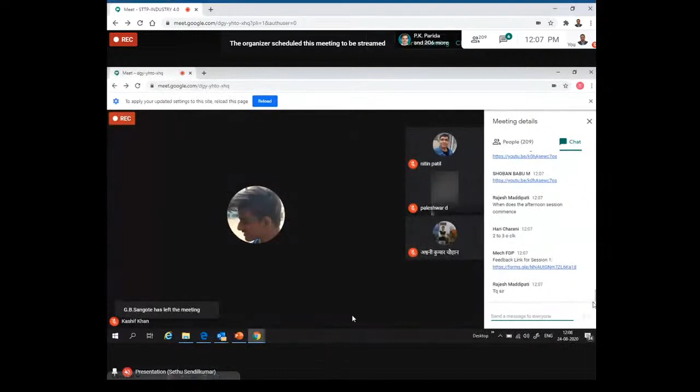When you are making the selection, you have to see that you have the valve appropriately sized, because we can start with 40 liters to about 5,000, 6,000 liters. If you choose something lower and try to reach your objective, it's a wrong selection. When there is a possibility, straight away choose that particular sized valve so that you can get the required flow rate. Okay, sir. Thank you, sir. Okay.

What are the causes of failure of sensors? Using a sensor is an art in itself. You can place the sensor, but in order to get a meaningful output, you have to have a good knowledge and understanding of the parameter or the functional relationship of those sensors, because you might detect something else that is not required instead of the purpose of using that sensor.

Sensors can fail depending on which type of sensor. Maybe you are connecting to an over voltage, or in the case of an optical sensor, the lens is clogged with some foreign particles. It might not give you a meaningful output. These could be some of the possibilities. For a magnetic sensor, if there is a magnetic field around it more powerful than what is used inside the piston, that might also induce a current. That could be one possibility.

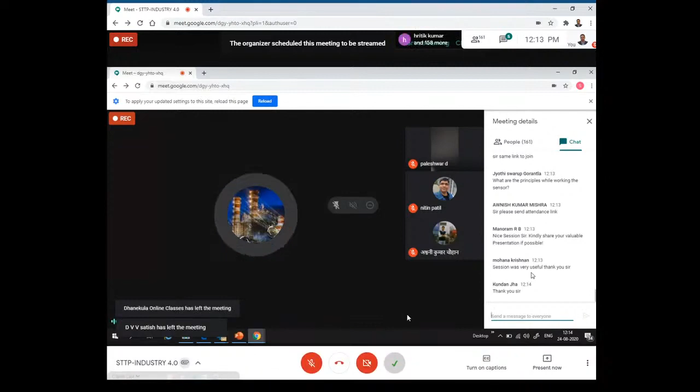Can you come again? Suppose I have a Rockwell PLC or Siemens PLC. Can I integrate both of them? Yeah. So now Siemens PLC comes as

I think we lost the connection from you. Hello. Can you hear me? Yes, sir, we can hear you. Please go ahead. You are audible. Yeah, I'm sorry, my computer ran out of power. I am speaking from the other computer through my colleague who will present in the afternoon about FluidSIM and all those things.

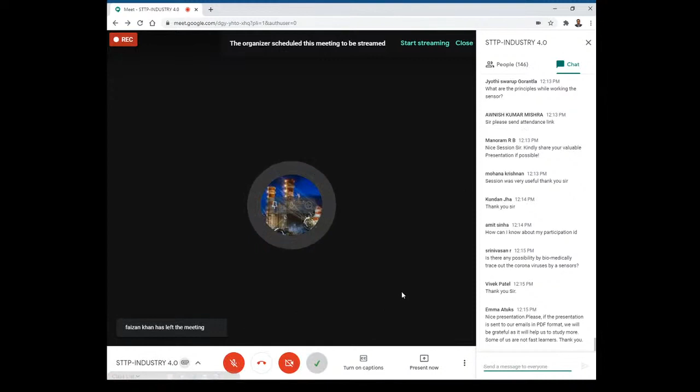So basically, you were asking whether it can be connected to any PLC. Of course, a Festo PLC you can connect by default. The OPC server is actually configured for FluidSIM and Festo PLC, that is the CODESYS PLC, but it doesn't mean that other PLCs cannot be connected. You could use another device known as the EasyPort, which can be used to connect any PLC with the FluidSIM arrangement. So I have to install a third-party driver? No, the driver is available by default if you use the EasyPort. Okay.

So that we will see in the afternoon. We will show you how exactly you could connect to any PLC as well as with a Festo PLC. We will be trying with a Festo soft PLC. That means you don't have a physical PLC; the computer resources are used as the PLC. But similarly, you can do it. It is only switching the inputs and the outputs to different means. So the OPC server has got that adaptability.